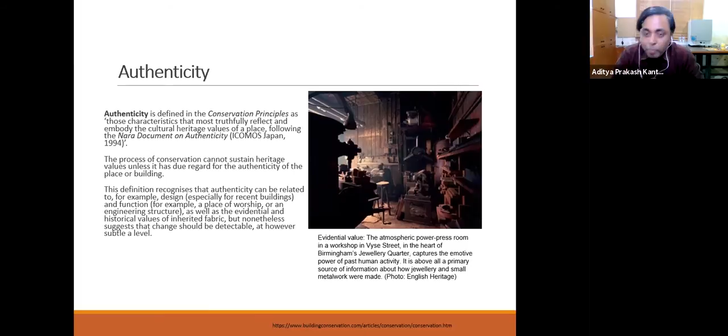Here we need to protect the historicity, the design, the type. Suppose someone wants to visit Red Fort - when someone visits, they should not feel that this structure is a little new or that some kind of alteration has happened which actually conflicts with the history. So we have to take care of all those things which can retain the historical importance, retain the aesthetic importance, retain the physical significance, all these things.

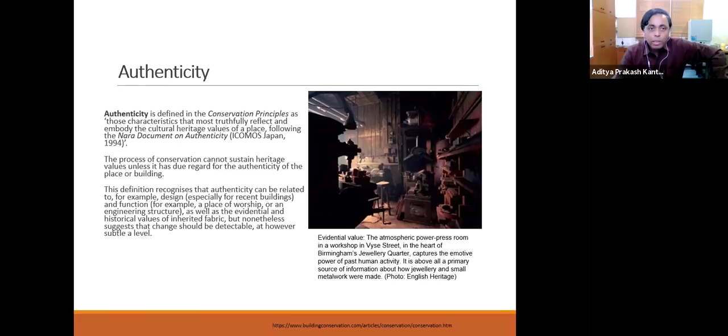And that is what we mean by authenticity when we discuss monuments and heritage sites. After understanding the value and the authenticity, we have to understand a little bit about the meaning of the word monument. Generally we all know that which is built in someone's memory, or in memory of something, is called a monument.

But we have here a clear-cut definition given by the Act, the Ancient Monument and Archaeological Sites and Remains Act, 1958. It also has an amendment in 2010, but the definition remains the same even in the amendment.

I'd like to highlight that the definition of antiquity and monument cannot be based on our own interpretation. We have to follow verbatim what the act tells us, because if we interpret it based on our own understanding, it may have legal implications. To avoid that, we must strictly follow the definitions as written in these acts.

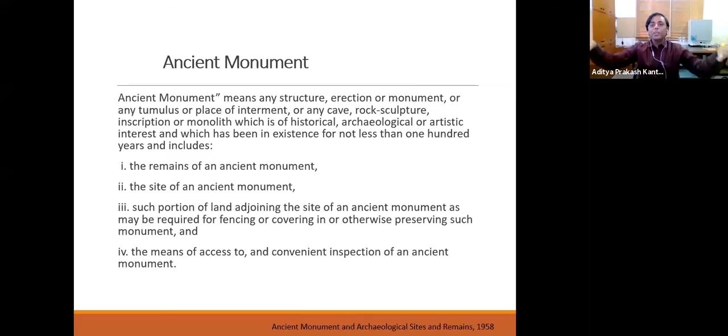It also tells us the remains of ancient monuments come under the monument category. The site of an ancient monument and its precinct is also considered monument, like land adjoining the site required for fencing, covering in, or otherwise preserving the monument, as well as the means of access for convenient inspection of an ancient monument.

Now let me take you to the understanding of archaeological site and remains. It means any area which contains, or is reasonably believed to contain, ruins or relics of historical or archaeological importance which have been in existence for not less than 100 years, and includes such portion of land adjoining the area as may be required for fencing, covering in, or otherwise preserving it. These are the basic definitions of monument and archaeological sites and remains.

Now, why do I want to stress on the definitions of these terms? It's to highlight that in the past, a lot of issues arose because of lack of understanding and lack of clarity in these acts, and what kind of problems and issues this causes. I'll discuss that now.

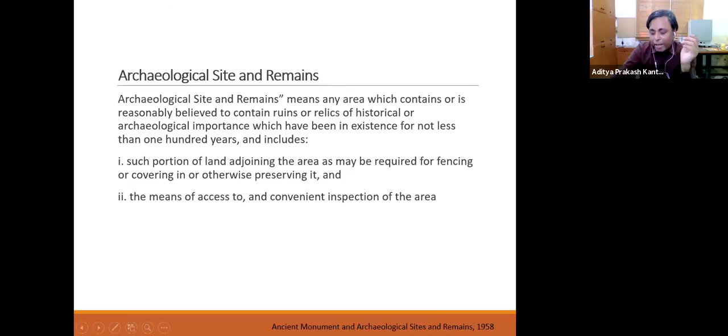Then the government of India now wants to address all the issues, to iron out all these problems and streamline whatever problems existed. So the first part of the management is to do proper recording, proper documentation. Proper documentation becomes very, very vital. If we want to prepare a list, the preparation of the list becomes very important. And when we prepare a list, we have to also take care of the conflicting issues and those issues where there is no clarity given by these kinds of acts.

For example, would you say an individual structure is a monument, or would you say the entire precinct is a monument?

How will we construe this? Suppose the Red Fort is a monument. If we say Red Fort as a monument, will not the individual structures, the independent structures inside the premises, also be counted as monuments? What should we do?

There are many structures which have their own importance in Red Fort, New Delhi. I have worked to fulfill all the parameters of UNESCO to make the Red Fort a World Heritage Site. And so the Red Fort in 2007 gained the status of World Heritage Site by UNESCO.

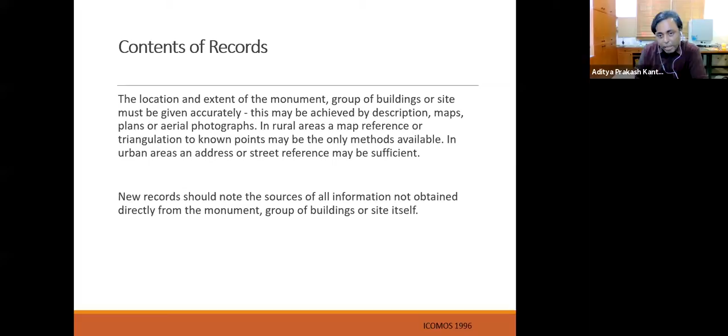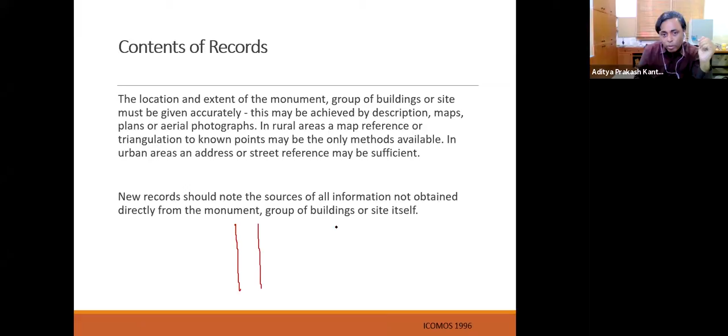Sometimes it becomes very difficult to map a certain place and to also see the distance and measure the size of a site. So what generally is done is measured by the triangulation method. The triangulation method is, suppose this is the road where we have access, and here we have the river or forest, and then somewhere here is the archaeological site, and we want to measure the distance here to here.

So the triangulation method is that we take one point, and with the laser we beam the laser at a certain angle, and we also beam the laser at another angle. So we know this distance, we know this angle, suppose 30 degrees or 45 degrees - say 30 degrees. So if we know the angle and we know this distance, we can measure this distance, and we can say this site is this much far from here.

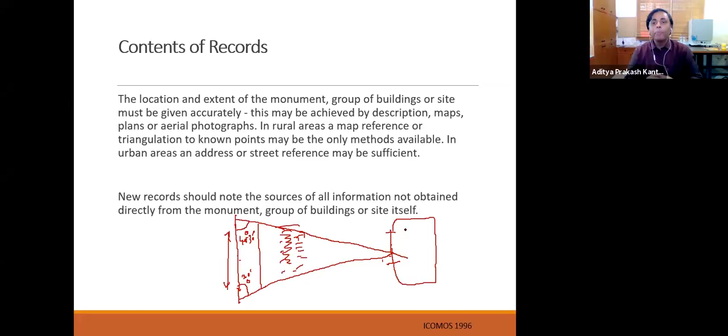So this is some kind of triangulation method by which maps and references are prepared for very difficult areas where the accessibility is very difficult. So these triangulation methods actually help in calculating the distance, in mapping the site. So several triangulations can be done, and we can measure the distance and the size of the place.

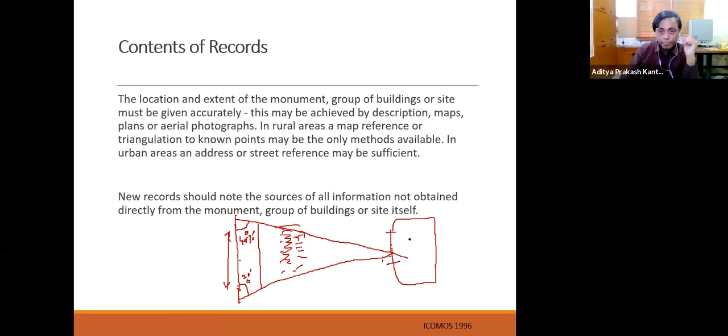So these all constitute the content of the record. Anyone, any firm, who wants to do this recording should look into these parameters. You have to capture all these things, and then you can compile a good record.

And many more things, like the traditional technology and modern technology adopted in construction and maintenance, the origin, the ownership, authorship, then the subsequent history of uses — like, in the Mughal period, what was its use, and in British time...

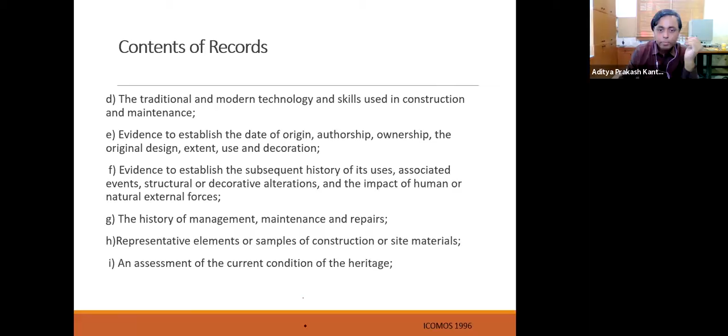Then measured drawings — the drawings also have to be there, all sorts of drawings, the elevations. Here the architect comes into their role — windows, elevations, whatever.

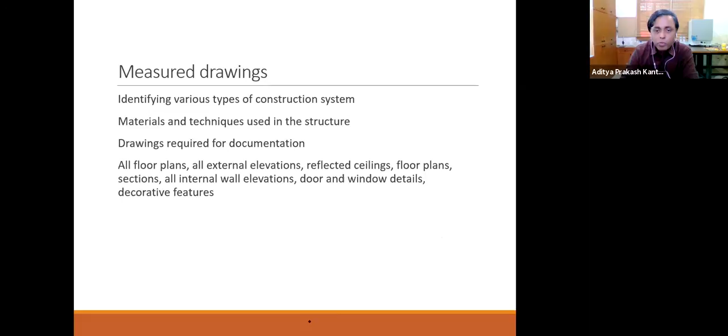Then problem identification — we have to also identify the problems existing at the site, what kind of defects are there, and prepare the legend of all defects. Legend means in problem identification we list all the types of problems: physical problems, alterations due to chemical change, alterations due to pollution, dust, dirt, bird accretion, mold growth, algal growth, growth of lichens, or bat-related problems. In monuments and heritage sites you'll find a whole host of such problems. So we prepare a list of all the problems, and then we prepare the documentation.

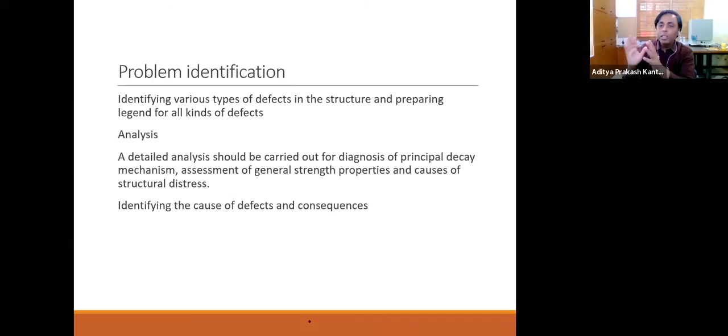And we also have to do the diagnosis of the decay mechanism, assessment of the strength of materials, and the structural distress. There are many technologies we adopt in identifying structural problems and identifying how stable the building or monument is.

Now, before coming to tourism and visitor management, which is the next part, once the recording part is over, I'll just tell you one thing — to develop and prepare the management guidelines, we have to also look into the revenue generation model.

Revenue generation model — what should be the revenue generation model for heritage sites and monuments? Today, if we look at it, most heritage sites and monuments can safely be placed in two categories. I will classify monuments and heritage sites into two categories: ticketed sites and unticketed sites.

Now, we have to understand that we also have to promote the sites to have some revenue generation. How can we generate revenue from the monuments and from the heritage sites? That should also be one part of the management guidelines — the revenue generation. So sometimes, like for ticketed sites, it is the ticket.

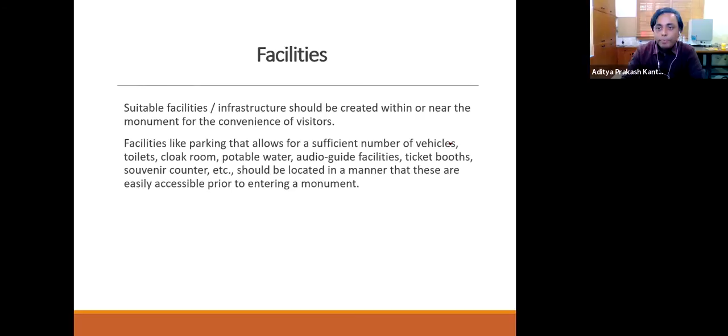For heritage sites, as part of the management guidelines, we need information and interpretation centers. These should be designed and located so they do not disturb the environment and setting of the monument. It is important to decide whether to construct the information center outside the premises or inside the premises.

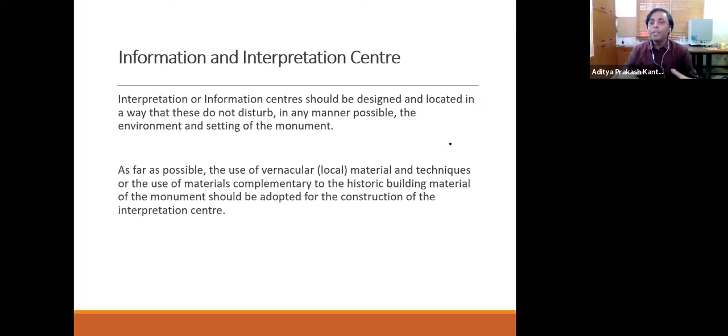Try to use compatible materials, similar to those present in the heritage site. This will give it a heritage look and it will not become outlandish to the premises. If something is very old, and in front of it we construct a very modern structure, it will look outlandish. So the materials for the information and interpretation center should be compatible and in sync with the other structures of the premises.

What should be the content in the interpretation center? Guidebooks, pamphlets indicating the monument's history, its architecture and planning, and various do's and don'ts for visitors. Then appropriate medium, technology, and innovative methods of interpretation, like audio-video guides in multiple languages, and all information should be placed in the information and interpretation center.

Then there is the visitors' approach - how we can facilitate visitors. The circulation of visitors should be worked out so that it facilitates easy, smooth movement around the monument or heritage site, and we can provide optimum accessibility, causing the least hindrance.

We also have to take care of the influx of high visitor numbers if the site is very popular, and provide adequate signages at access points, entry points, various sections, and facilities near the monument or heritage site. Signages should contain do's and don'ts, historical importance, scientific significance, or anything else a visitor should know or take care of. This has to be placed properly and must be visible.

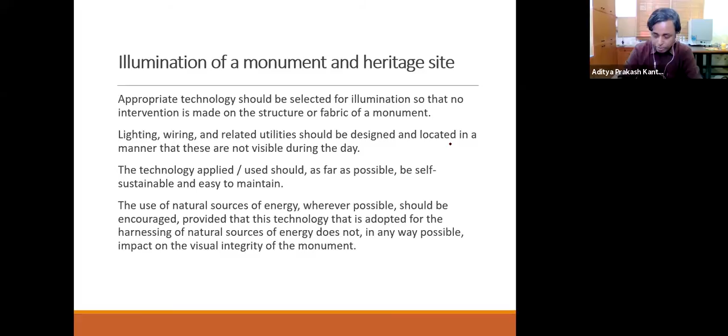Then we have to look at public-private partnership in heritage conservation and management. When we talk about revenue generation, public-private partnership can be fostered - it will add a lot of revenue, build good facilities, and also ensure good maintenance.

For example, there was a lot of furor when the Dalmia group was given a portion of the Red Fort, New Delhi, to take care of for maintenance activities. There was a lot of furor in the heritage circle - how could the Government of India allow private parties to maintain heritage sites? But looking from the revenue generation and maintenance perspective, government cannot do everything. If we allow private parties in this joint effort, certainly the sites will improve.

It is not just about that - all these revenue generation activities are very much required, because the site has to evolve.

Site has to evolve and it has to become efficient. And how will it become efficient? We have to also bring in the private players with certain restrictions. We are not allowing that private players can do anything whatever they want with the fabric of the structure or the site. Within certain limitations, certain restrictions, we need to allow the private parties to play their role in maintaining the heritage sites and in its promotion and development.

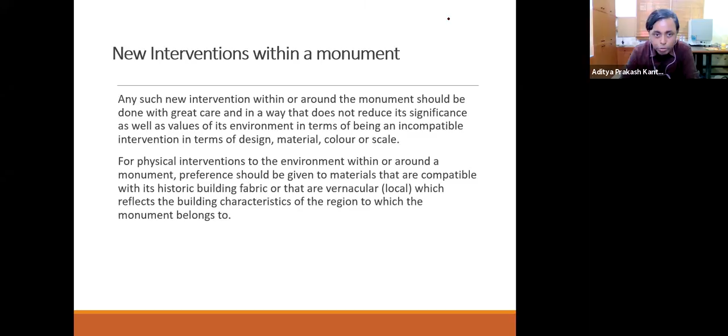For physical interventions to the environment within or around a monument, preference should be given to materials that are compatible with the historical building fabric or the vernacular, which reflect the building characteristics and the region to which the monuments belong. Okay, so I will just pass it here for reading.

Then, as a part of the management guidelines, we have to also take care of the disaster management, and that has to be properly, very properly written and taken care of.

Now in the disaster management, we have to first assess the probable disaster. So we have to first understand what kind of disaster can happen. We have to understand the threats, the vulnerability and the risks. And then we can prepare a mitigation plan, a disaster response plan, and a disaster recovery plan. So disaster mitigation is the first step where we understand the risks and the threats.

So we act in such a way that we can mitigate the disaster. Suppose an earthquake has to happen, we have no control over it, and in 30 seconds it can level the building, it can level the entire site. At least we should be able to prepare and be ready in such a way so that the damage is minimum, and that we prepare in the disaster mitigation plan.

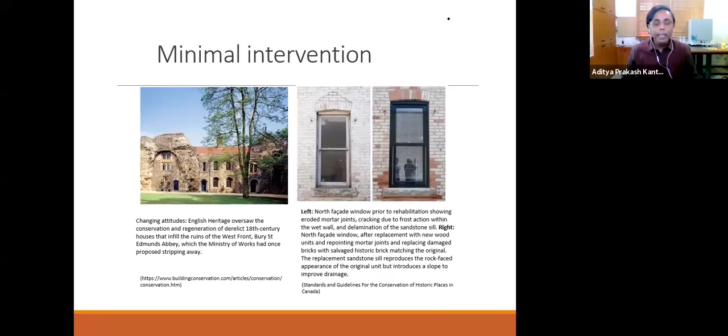Okay, one more thing: whenever we discuss alteration or modifications or any intervention, we always go by the term minimal intervention. So minimum intervention should be the policy of any planning effort, any conservation effort. Then the conservation management plan should also become an integral part of the site management plan.

Then we have to also look for some conflicting values, how best we can address the conflicting values. Then, just these two or three slides I have, on the list of World Heritage in danger. Suppose some structure or heritage site which is very prone to some serious threat, there is the World Heritage Convention 1972, which has clearly laid out the procedure for what to do, like how we can list a monument or structure or site in the category of World Heritage Site in danger.

So the first requirement is that the heritage site has to be in the World Heritage List. If it is in the World Heritage List, what kind of threats or danger is the structure subjected to? And what major operations are necessary for the conservation of the property?

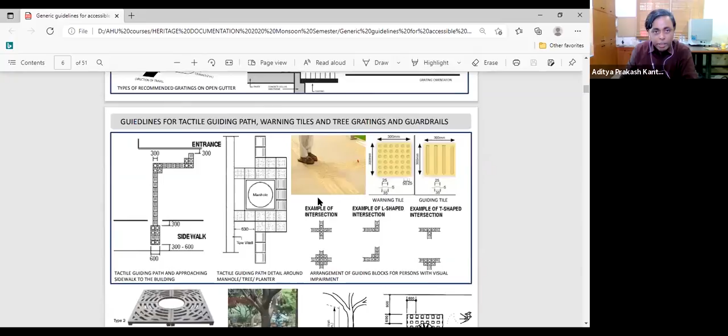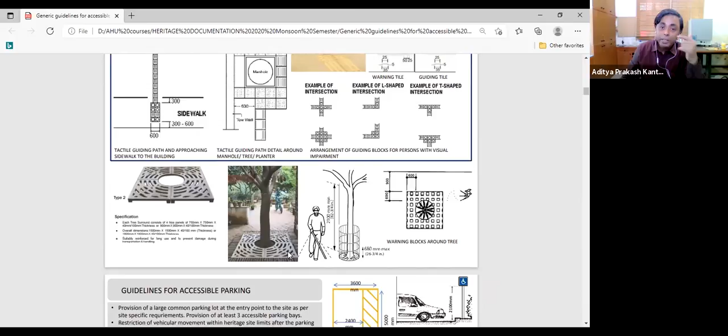What kind of wheels, carts, and signages can be there, what kind of walkway can be prepared. This PDF is very interesting and informative. If there is a tree, what to do, what kind of blocks can be placed near it, so that anyone, even the differently abled, when they step on this, will understand quickly that there is a standing tree ahead.

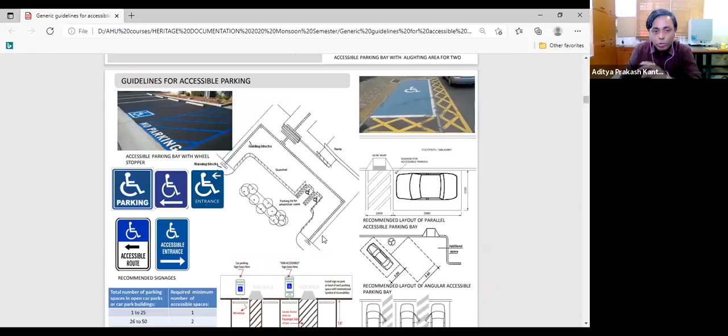Then the parking, how the parking area should be developed, which way the entrance should be. If battery operated cars have to be placed, what should be the requirements and guidelines. All this is covered very well. If a ticketing center or information center has to be developed, what are the guidelines, what one should do.